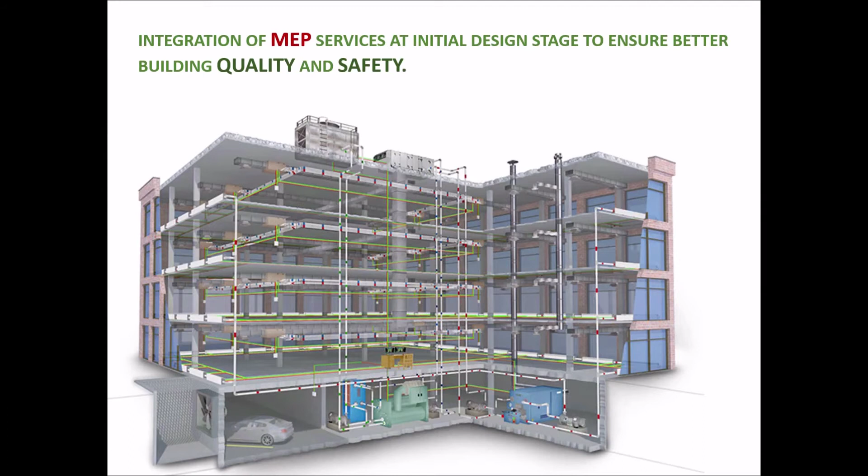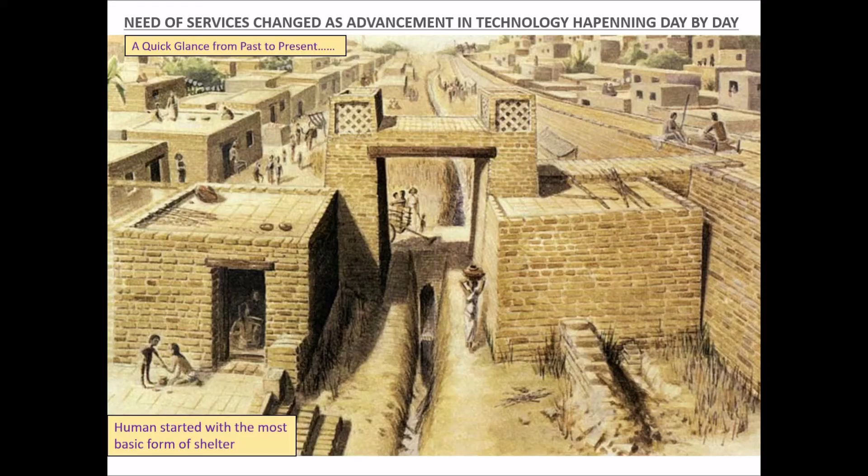Need of services changed as advancement in technology is happening day by day. A quick glance from past to present. Humans started with the most basic form of shelter. The shelter evolved with increasing needs and progress in building materials. New materials thrived in the market. With the invention of breakthrough technologies in AEC, architecture, engineering and construction, buildings expanded vertically and skyscrapers came into existence.

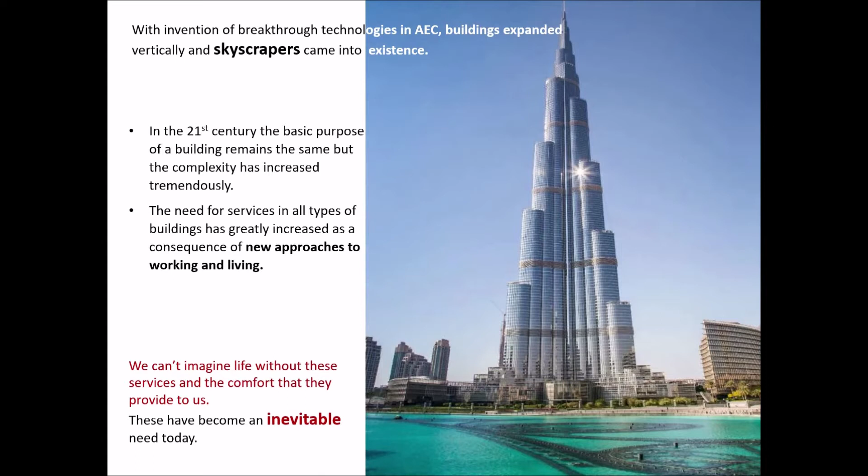In the 21st century, the basic purpose of a building remains the same, but the complexity has increased tremendously. The need for services in all types of buildings has greatly increased as a consequence of new approaches to working and living. We can't imagine life without these services and the comfort that they provide to us. They have become an inevitable need today. And now we have buildings with complex functions and services like malls, hotels, and hospitals.

So now you have understood the importance of MEP services in modern buildings and future construction. Now there is need to talk about the key role players involved in the design decisions about the integration of services with the structure at initial design phases. Role players. The complexities of modern construction have given rise to the need for various professionals and specialists to come together and work as a team. They include architects, structural engineers, service consultants, clients. The designer and architect is responsible for proper coordination among the whole team.

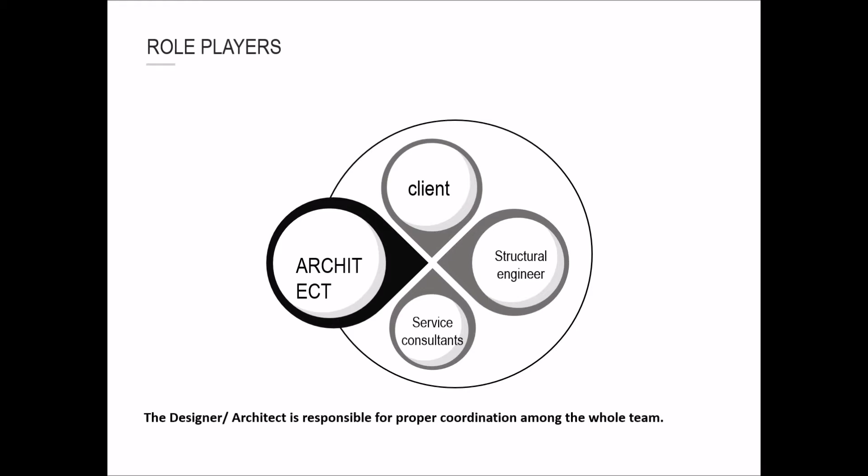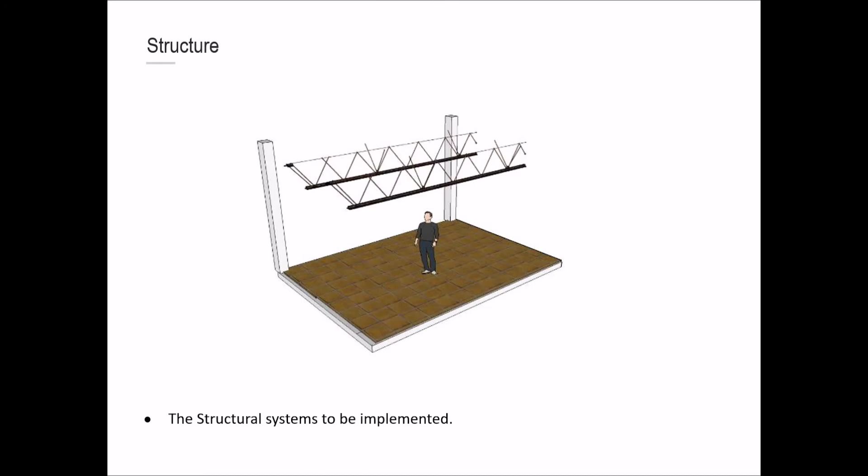What all should an architect consider and keep in mind while designing a building? The function of the spaces, the structural systems to be implemented, the services to be accommodated, the building envelope. Among all above components, the structure and services integration plays a major role in the building's quality and safety. The quality of the final product depends on how well these factors are integrated and brought together.

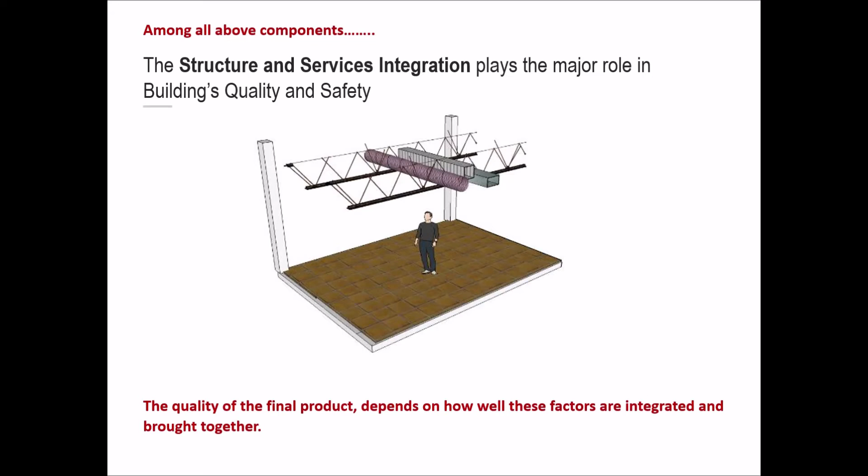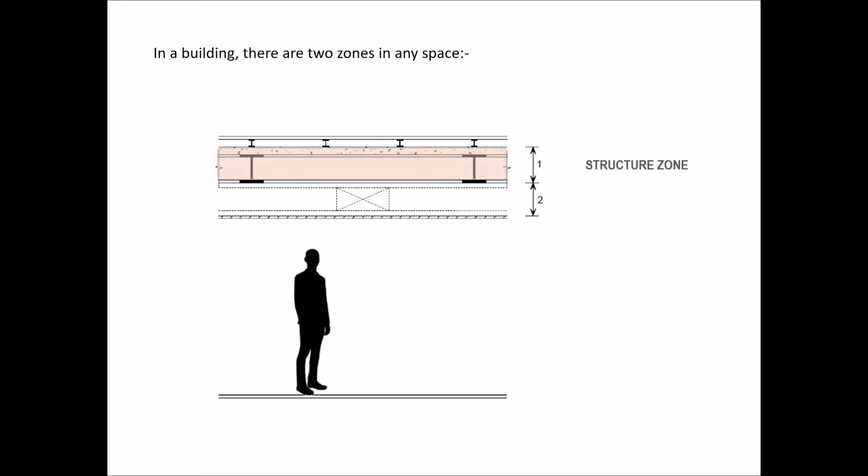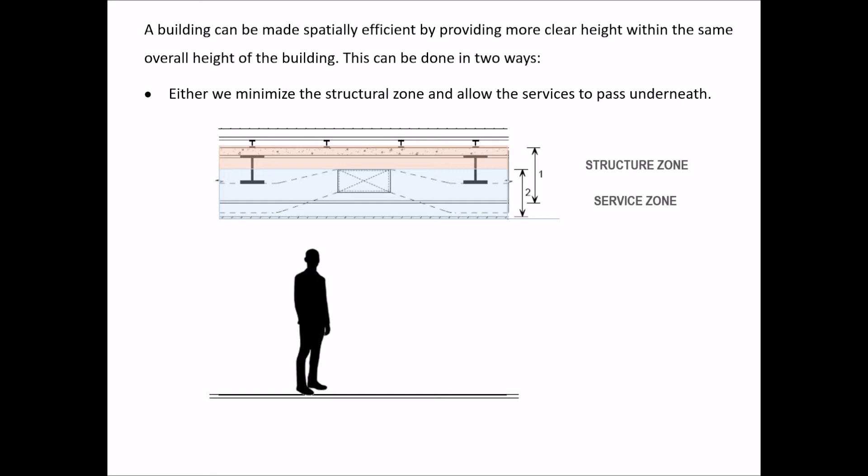After learning the key role players involved, we will learn the concept behind services integration and some ideal examples of services integration with the structure of the building. So the methods of integration are: in a building, there are two zones in any space. First, structure zone, second, service zone. A building can be made spatially efficient by providing more clear height within the same overall height of the building. This can be done in two ways. Either we minimize the structural zone and allow the services to pass underneath, or we accommodate the services within the structural zone, thereby combining the two zones.

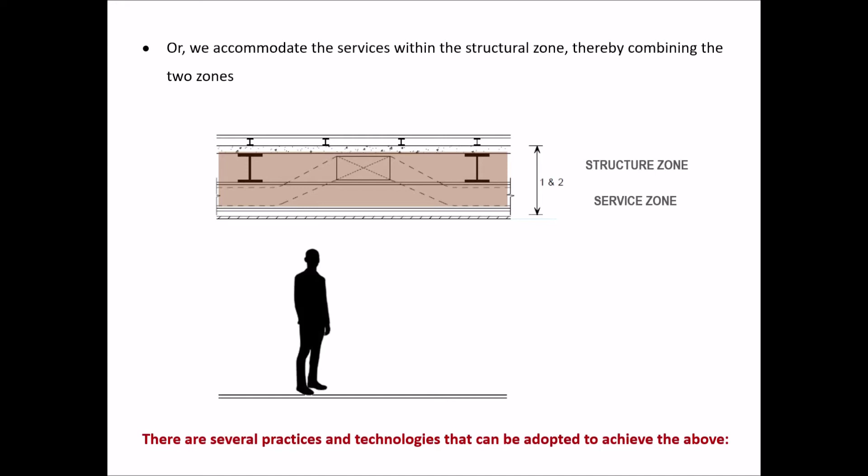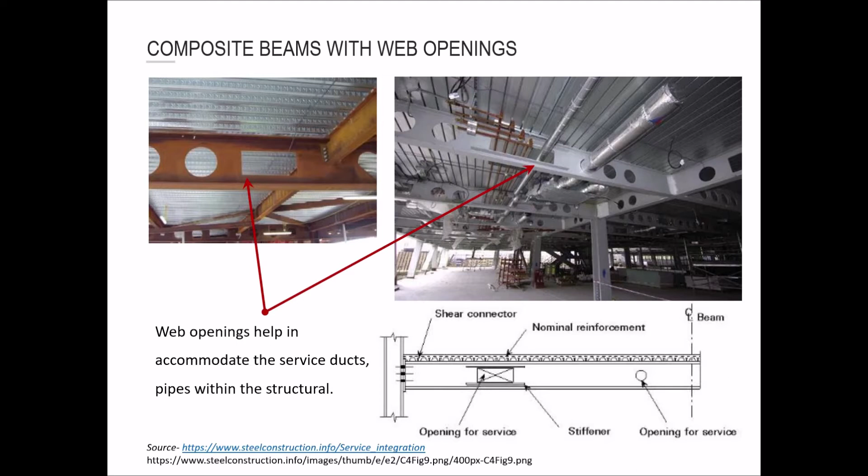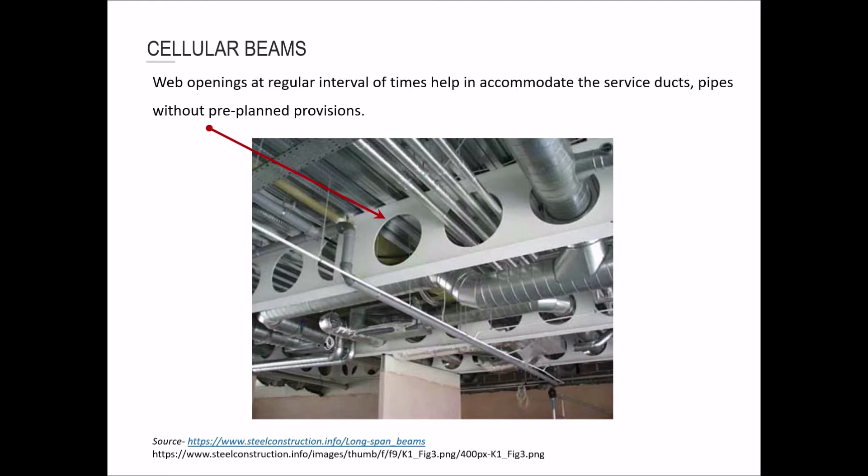There are several practices and technologies that can be adopted to achieve the above. Composite beams with web openings. Web openings help accommodate the service ducts and pipes within the structure. Cellular beams. Web openings at regular intervals help accommodate the service ducts and pipes without pre-planned provisions. Tapered beams. Less depth of beams at ends provides space for ducts, services and pipes to go through without occupying the available depth of beams at midsection.

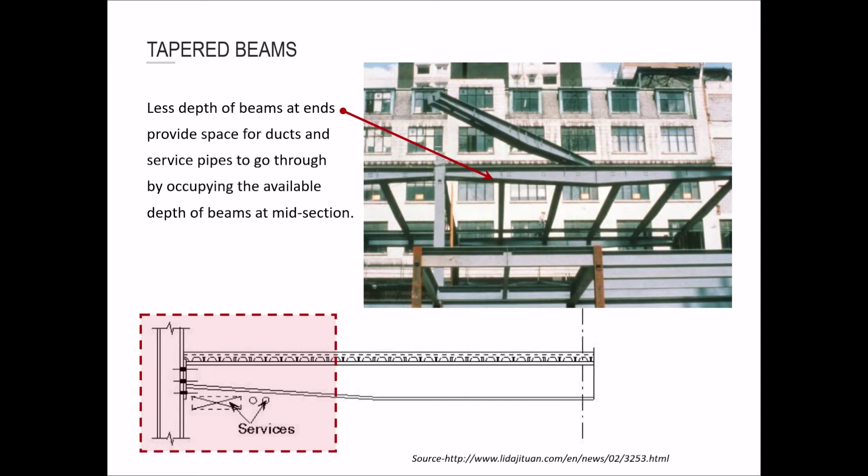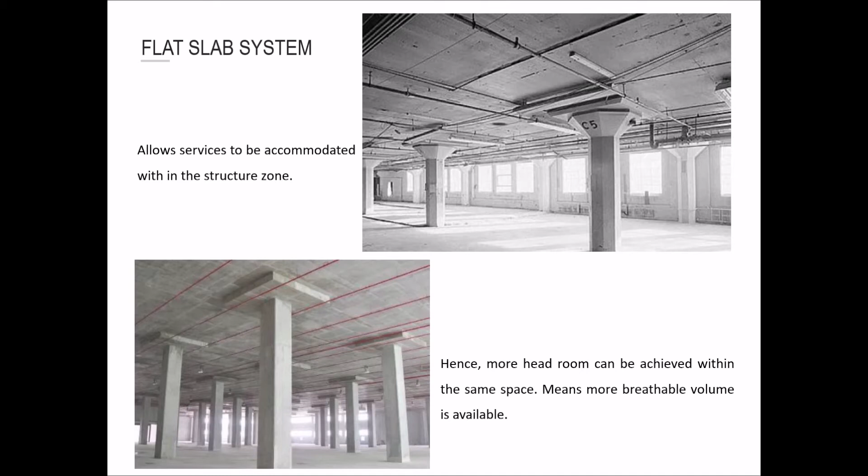Composite trusses. Composite trusses have a lot of intermediate spaces available for integration of services through them. Flat slab system allows services to be accommodated within the structure zone. Hence, more headroom can be achieved within the same space, meaning more breathable volume is available. Post-tension slab system. A building frame with post-tensioning will lower cost for the foundation, columns and shear walls, facade, cladding and MEP systems, and also will lower operating expenses because of the reduced building volume.

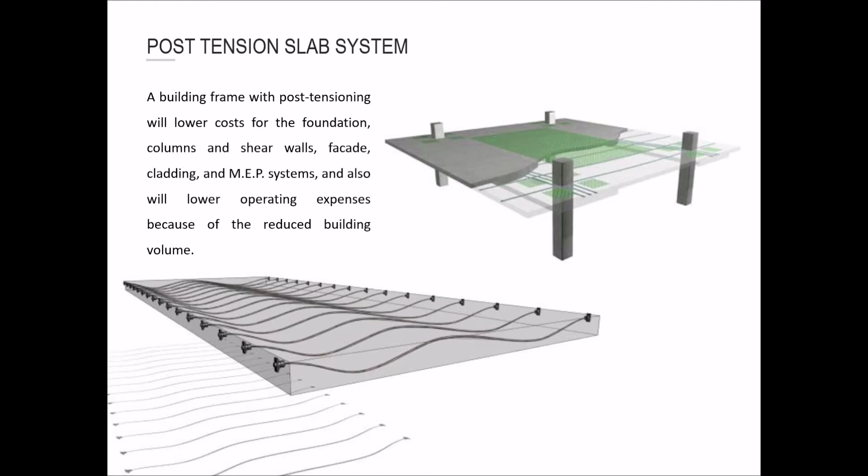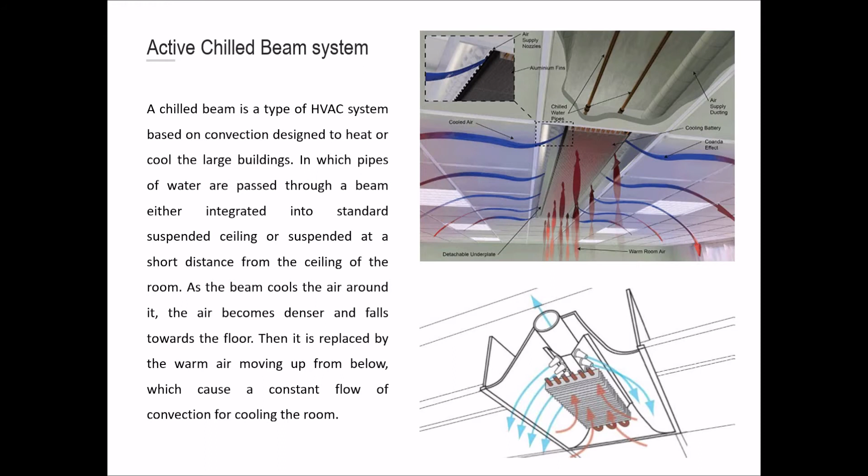Active chilled beam system. A chilled beam is a type of HVAC system based on convection designed to heat or cool large buildings, in which pipes of water are passed through a beam, either integrated into a standard suspended ceiling or suspended at a short distance from the ceiling of the room. As the beam cools the air around it, the air becomes denser and falls towards the floor. Then it is replaced by the warm air moving up from below, which causes a constant flow of convection for cooling the room.

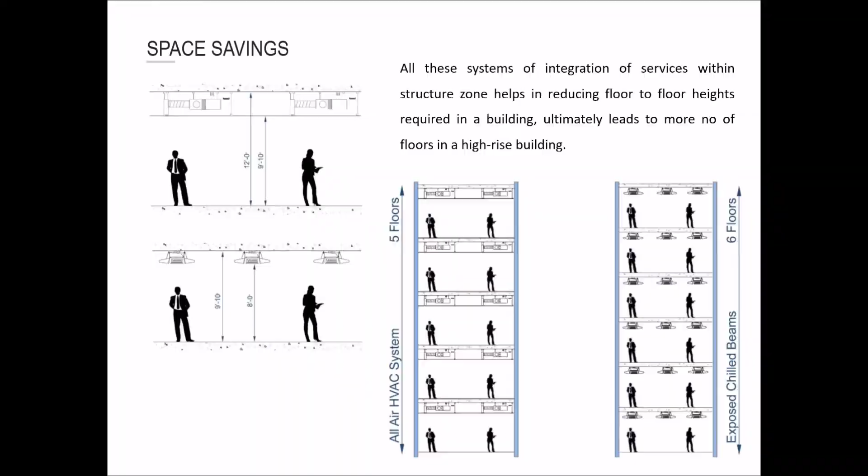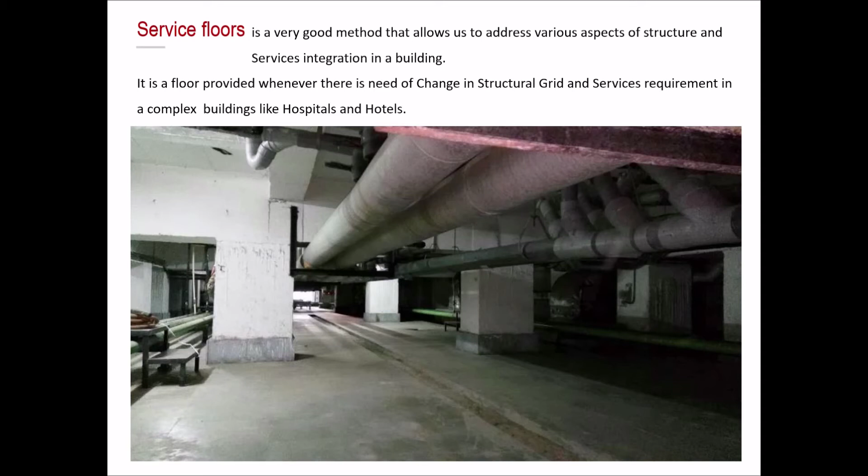Now talking about complex buildings like hospitals and hotels, one very important structural component is service floors. Service floors are a very good method that allows us to address various aspects of structure and services integration in a building. It is a floor provided whenever there is a need for change in structural grid and service requirements in complex buildings like hospitals and hotels. This picture shows a well-designed service floor. Here, the service ducts and pipelines have been placed on the sides, and there is enough room for accessing and maintaining them, like walking passages are left.

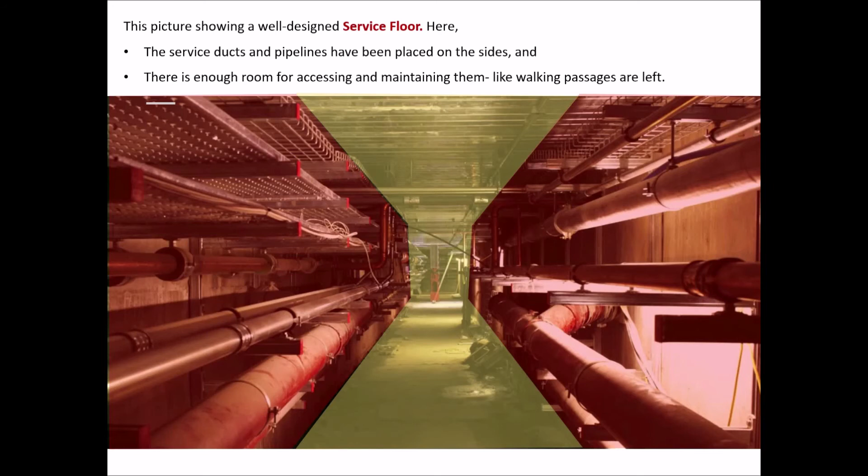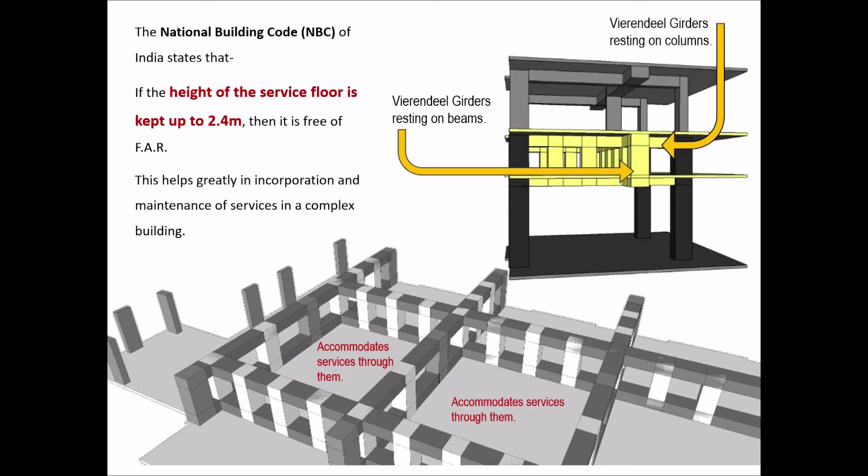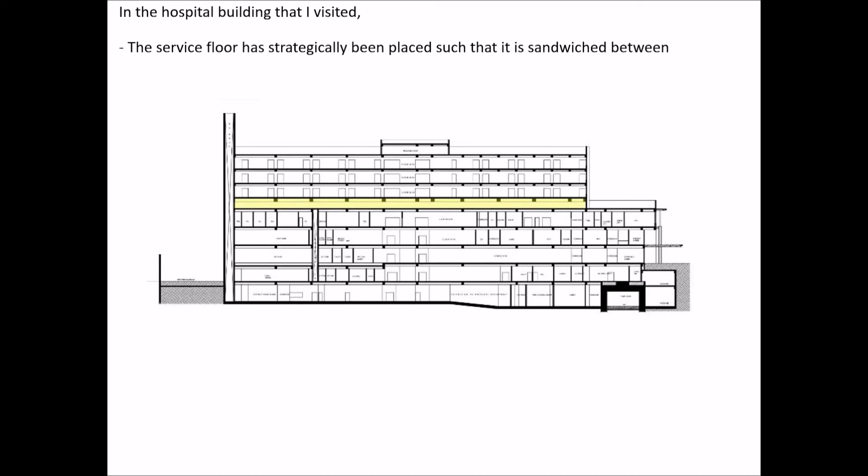The National Building Code of India states that if the height of the service floor is kept up to 2.4 meters, then it is free of FAR, floor area ratio. This helps greatly in incorporation and maintenance of services in a complex building. In a hospital building that I visited, the service floor has strategically been placed such that it is sandwiched between the patient room floors above and operation theaters below. The service floors also enable us to transfer services horizontally.

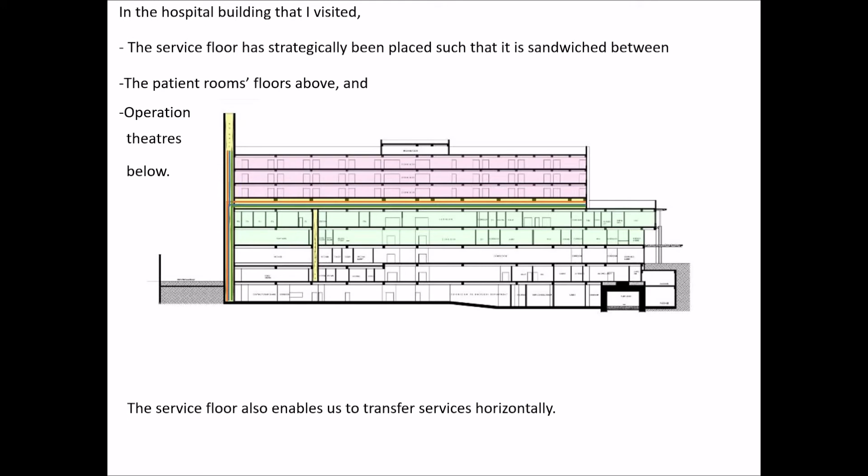Operation theaters require separate AHUs in order to maintain sterile conditions. By this strategic placement of the service floor, AHUs can be conveniently placed just above the operation theaters, thereby eradicating the need for ducts to run through large distances.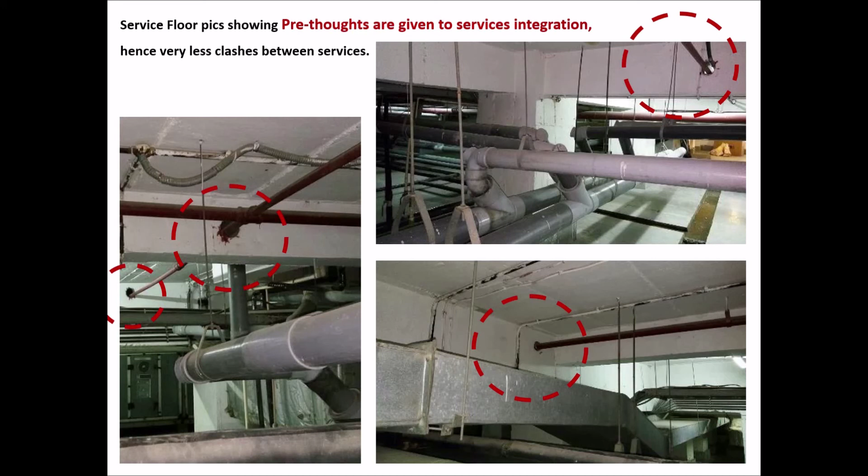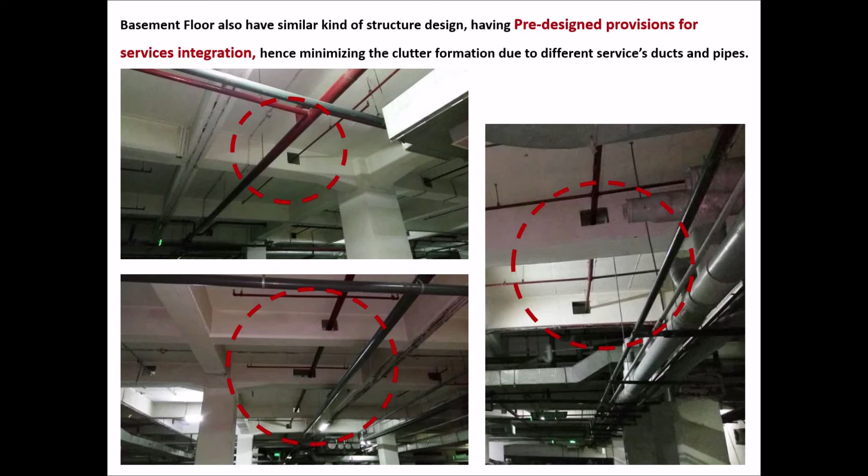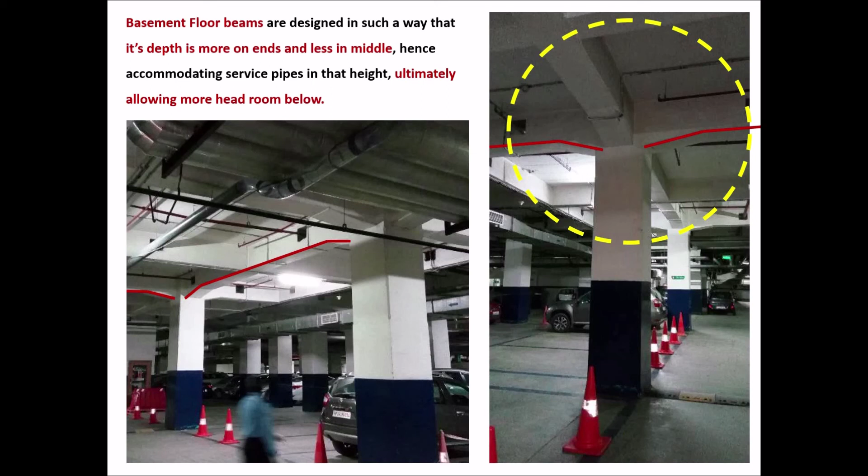Basement floors also have a similar kind of structure design, having pre-designed provisions for services integration, hence minimizing the clutter formation due to different service ducts and pipes. Basement floor beams are designed in such a way that their depth is more at the ends and less in the middle, hence accommodating service pipes in that height, ultimately allowing more headroom below.

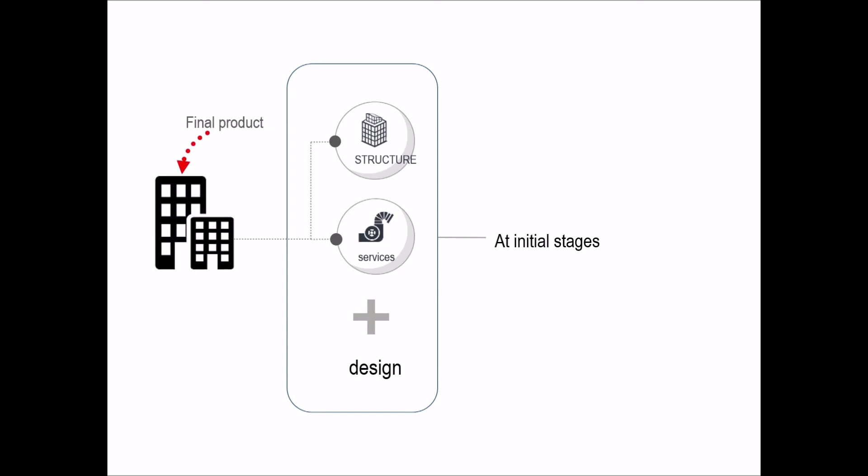So the conclusion is, in a building with structure and services combined at the initial design stages, the final product will have enhanced building quality and safety of people. So the final product is efficient, comfortable, cost effective, easy to maintain and flexible. Ultimately, it gives happy end users. So this presentation is about the need for proper integration of building services with the structure of the building to have a neat and effective execution of services.

The right execution of services affects the building life cycle from construction stages to the post-construction phase, that is the operation and maintenance phase of the building. If any service has difficulty in its execution at construction time due to issues from design decisions, then it will surely be a problem in future operation and maintenance of the building, that is in the post-construction phase. Hence, it gives degraded building quality and safety of people in a building. So it is recommended that pre-thought should be given to the integration of MEP services with the building structure at initial design stages to ensure better building quality and safety of people.